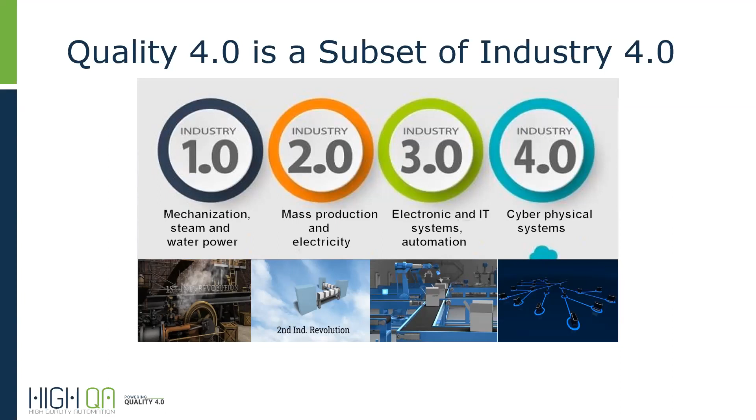But actually, if we look into the CAD/CAM industry, it started to evolve in the mid-70s, about 45 years ago, enabling seamless and automated design to manufacturing. And since then, CAD/CAM became more advanced, intuitive, faster, moving from wireframe technology to solid model technology, and enabling realistic design and manufacturing, including analysis like flow and stress analysis and much more.

But let's take a look into the quality side, and we'll ask the question: how long does it take to create a print, bubble it, extract GD&T to an inspection plan, create in-process inspection, assign inspection tools, collect data, and so on and so forth? 370 minutes—those are the average times that we measured.

And the question is, why does it take so long? And what will happen if we have to add more quality activities? We need SPC, we need APQP, we need to create sampling, lot management, and so on and so forth.

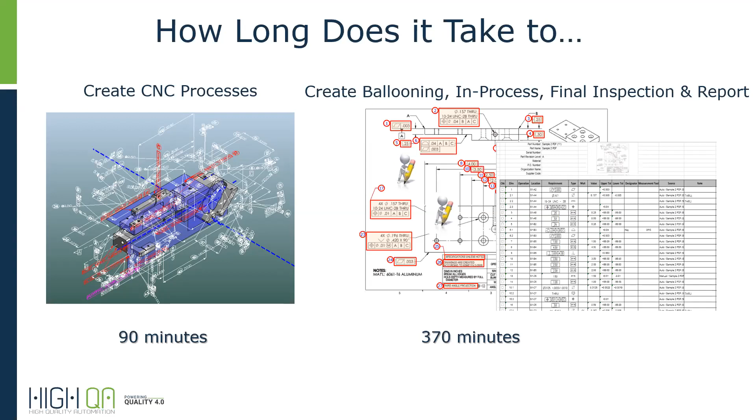One of the biggest reasons is what you see on the screen. I'm not sure how close to CAD/CAM the industry is today, but more than 80% of the industry is still making bubble prints by using pen on paper, and then extracting GD&T to an Excel sheet manually. There are some big gaps when we talk about Quality 4.0, when 80% of the industry is still doing it manually.

Let's take another example. How many software packages do we need to complete quality jobs from A to Z? We can count them one by one—these are just examples, there are many of them. And then where does all the data that we are generating from each one of these applications or solutions go? Can we get it real time? It's a big question.

Here's another example. There are hundreds of inspection tool types, tens of thousands of measurement tools, from manual to Bluetooth wireless, CMM, vision, arms, laser—you name it, you have it.

Those inspection tools are growing daily. The question is not just about measuring the part, but where this data goes - either on a written piece of paper, typed into Excel, or clicked into Bluetooth tools - where all this data goes and when it is available to me when I need it.

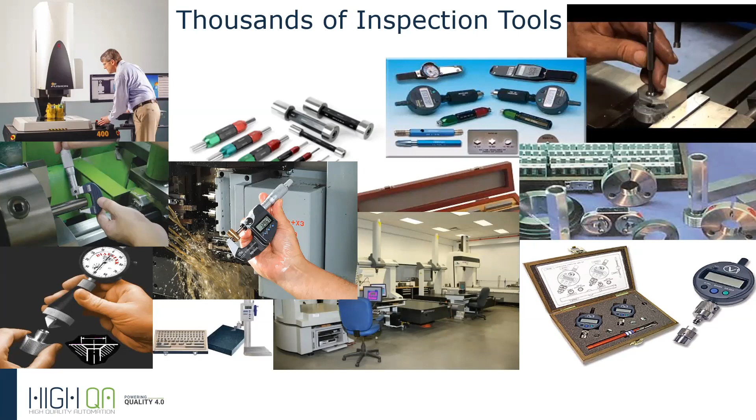Maybe we'll take another example, talking about statistical process control, SPC, which is an industry standard methodology for measurement and controlling quality for the manufacturing process. Actually, SPC is a growing demand by OEMs from their suppliers, and it's adding a significant burden and cost that requires expertise and another software solution in many cases, among many others that are already part of the quality process.

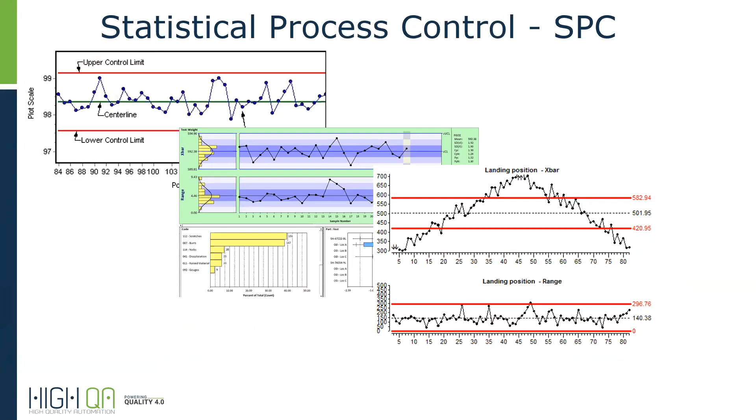Well, we can go on and on. Maybe one last example - the APQP. The APQP consists of multiple packages, activities, forms, and workflows - FMEA, PFMEA, control plan. What software do people use? Talking about 99% of the industry, we all know it's Excel. But not just Excel - it's Excel on steroids. You can find people proud of how many tabs they have on their APQP Excel file.

No doubt those people are amazingly skilled and talented, but again, it's done manually. And the question again is about data. We have a lot of data - we have data here, and we have data in data collection. The question is, where does all this data go when I need it?

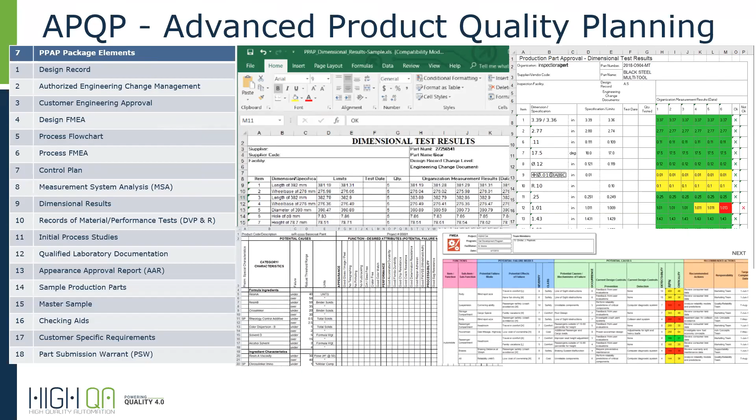So one of our strategic customers - I'm just trying to quote what he told us - said: I have a lot of data, but I don't have information. My data is spread all over the place, in endless software folders, as well as shared or hard copies in boxes, reports, plans. And we have in-process inspection and SPC.

And the question is, what am I going to do with it? I can do nothing with it, actually, because it's spread all over the place. My hope is that no customer will come and complain, so I won't have to spend two weeks trying to find the data. And this is what he told us: I have a lot of data, but zero information when I need it.

And that's when we talk about quality 4.0. As quality guys, we have a lot of data. The question is, do we have information when we need it? Because quality is an integral part of manufacturing. It seems that we are only chasing manufacturing by adding more and more inspection tools to be better - better at go, no-go, or good part, bad part. And this is what quality is considered today.

But we are at a stage, or at a point, where we need to change it. We need to change the notion of the go, no-go department and try to close the gap of 45 years of being almost completely manual.

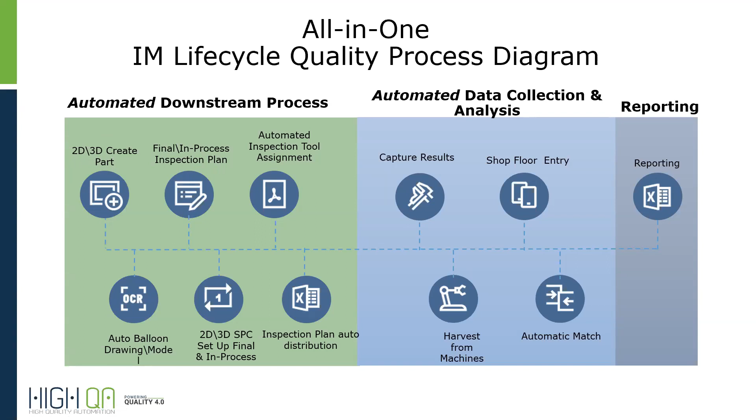You'll count how many systems or how many types of Excel you're using to complete one job - you know better than me. It can be 5, 3, 10, or much more. And the idea is, it's all in one. The reason we're talking about quality 4.0 is because it's an all database-driven application. So there's no need anymore to save as in folder X, Y, or Z and try to find it. Then there's a layer of API, because as a quality management system we live with other systems like ERP, PLM, and others, and we can integrate with them.

There is a layer of security on the user level and on the company level. Then comes the data source, 2D or 3D model. Then comes the layer of APQP, as I mentioned earlier. This is no longer Excel, it's an application integrated with the entire process. Then comes the layer of functionality that enables us to do A to Z. And once it's assigned to the shop floor or supplier, comes the data collection and reporting. And it's all in one system.

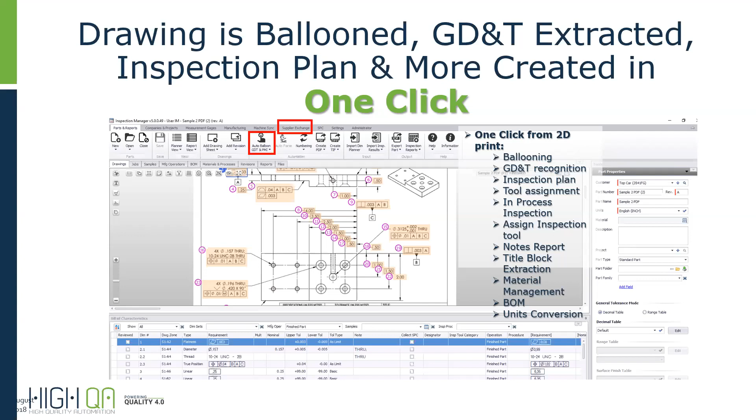Quickly talk about automation. As you remember, somebody used to do this process manually. Now there's one click, GD&T extraction, and all the balloons are created automatically, generating the bill of characteristics. It means we are taking away interpretation from people.

We support 3D, as I mentioned earlier, and we support it in a way that also closes the gap. When you get a 3D model, it's mainly limited dimensions or just critical dimensions, but the model describes the part, and quality is the process. We close the gap between what we call MBD and real quality processes.

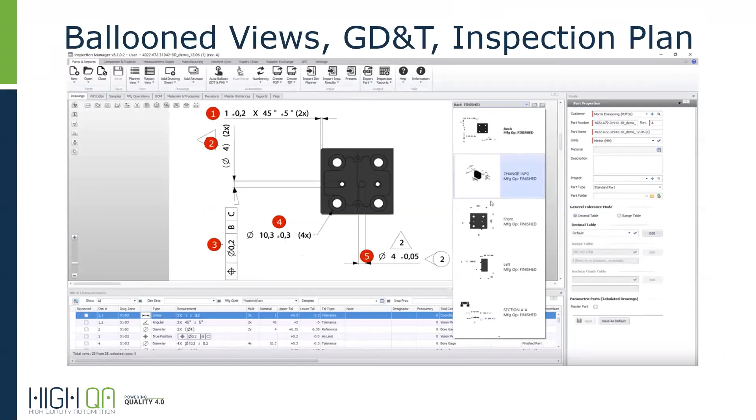Then comes what we call the checklist. If this is a project, you can see all your projects in one view. Once you've completed the forms, the system creates the submission package and can send it to your customer with the part.

Talking about shop floor data collection, as I mentioned, it's all in one. Data is collected from all types of inspection tools, manual inspection tools, Bluetooth, wireless, you name it. But it's not just collecting data on a piece of paper, it's going directly to the database.

When you see the SPC or out-of-tolerance data, everything is real time. I can correct my process if I need to, because I see exactly what happened in every dimension I'm measuring. Then comes the richness of reporting, from 2D print or 3D model all the way through reporting, and everything in between, in one solution.

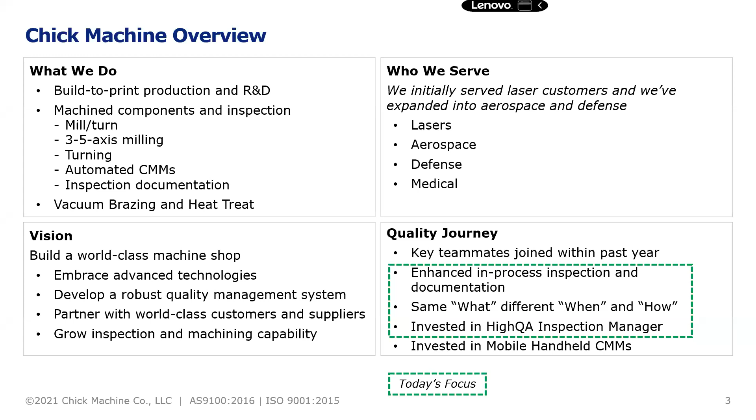Cool, yeah, thanks. And then kind of getting to the inspiration, this is Bobby, by the way, for HighQA.

Specifically the aerospace requirements around new product introduction and beyond, we started to see a bottleneck emerge probably about a year ago. So naturally, we started seeing parts pile up in quality. The team was starting to be overworked, and we stopped and said, what's going on? What's driving all of this?

We can machine the parts. We have the capability. We can inspect the parts. We have that capability. But when we started to dig down deep, we started to see that we didn't necessarily have the documentation capability. We kind of did it wrong, and we didn't do it at the right time.

Some examples were, again, the machinists inspected parts on the floor to ensure they were good, but they were just looking for that feedback for themselves that it was a good part.

But that's not good enough for an AS9102. Trust me, 'it's good' is not going to work, and checking part of it and writing down part of the inspection plan is not good enough.

So what ended up happening was all of that work unfortunately got shifted or collected by final quality. Not only were they creating these handwritten inspection reports in AS9102s, which is what you could see on the left hand there, but they were rechecking the parts because they had to verify that they were good parts, and they were, but it was handwritten.

And then aside from the handwritten inspection, with the CMM reports, we would print - I think there was one day we did a 337 part job, 100% inspection, all checked on the CMM, but our output was 700 pages of PDF, which is, you can't search that, you can't aggregate that, you can't summarize that, and quite frankly, it doesn't meet the needs, and it's not customer friendly, right?

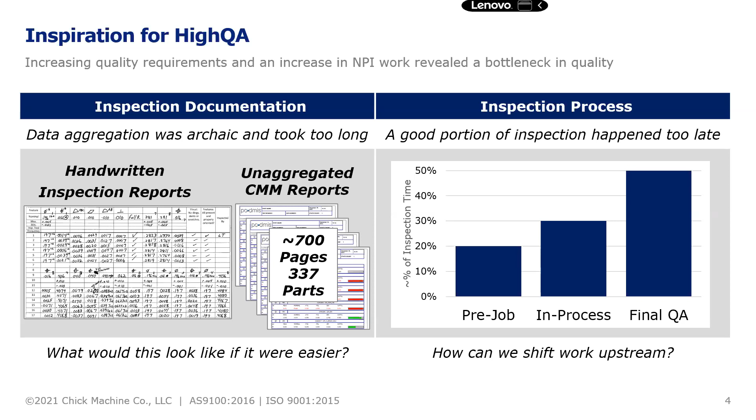So that's really what kicked us off on the search, and my dad could touch on what got us started. Yeah, so what we did after that, recognizing that the process was inadequate for the volume of measurements and the way in which we needed to present them to the customer, started a search on Google for what else is out there, looked in Modern Machine Shop, just did some searching around, and located two different software packages, one being HighQA that we put through - watched the demos, did the test drive.

The balloon printing, the auto ballooning, and the bill of characteristics really grabbed our attention quickly with HighQA, and we started on our way.

And that's something we'll talk about too, is that I think it's really important not to wait until it's perfect, but just to get something going and figure it out as you go, because you can learn a lot and learn really quickly by doing.

So we had some false starts. We bought what we thought we needed, and then we had to go back and buy more, and then we had to go back and change what we bought. But that was probably a 6-month process before things stabilized.

But we had initially thought we could gather shop floor measurements with Excel sheets and then import the data back into the HighQA database.

We also thought the PC-DMIS information, the output from the CMMs, could be written to a CSV file or some Excel form and then later imported. So we had a lot of multiple touches of the data. We had to handle it when it was first recorded and then handle it again to import it into the database. Found that was not an efficient way to do it.

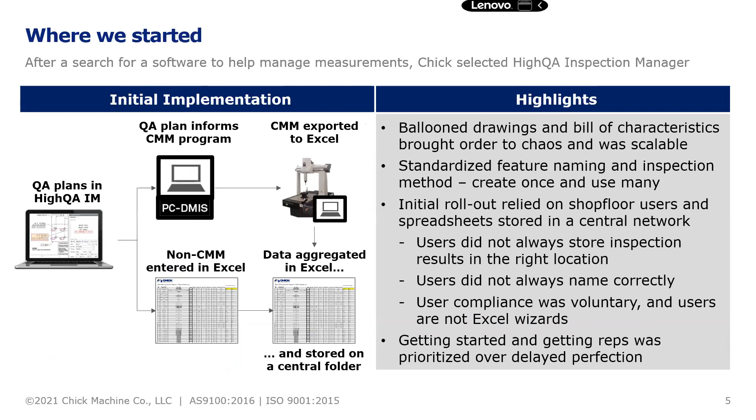Something to add specifically on IM: if you look at from where we were with the Excel inputs to where we are with IM - our machinists are fantastic at making beautiful, dimensionally correct parts, but they're not Excel wizards. So there was a lot of struggle with even data input, and a ton of time on the floor troubleshooting these Excel sheets.

So from a poka-yoke perspective and mistake proofing the process, this has been fairly successful. You have to have leadership support to do this, which my dad will touch on in lessons learned. But without traction and pull from the floor, it's a fruitless mission.

Specifically on IM, we've run out of licenses at times because people are using it, which is a good thing - which is also good for Sam, because we have to buy more.

Another thing on top of that, we've had some of our lead inspectors demand computers being rearranged and put on the floor where they do their bench inspections because they don't want to walk back and forth - which is a good thing, right? We didn't have that pull with the Excel sheets. We are getting that pull with IM, and if we could fuel that fire, we're going to do that. This seems like a relatively light lift to get traction on the floor.

Yeah, and I think the traction on the floor came from Jake's people going out when a job was assigned to help the machinist understand how to use that interface, how to use that application. And once you get using it, the learning curve is pretty shallow.

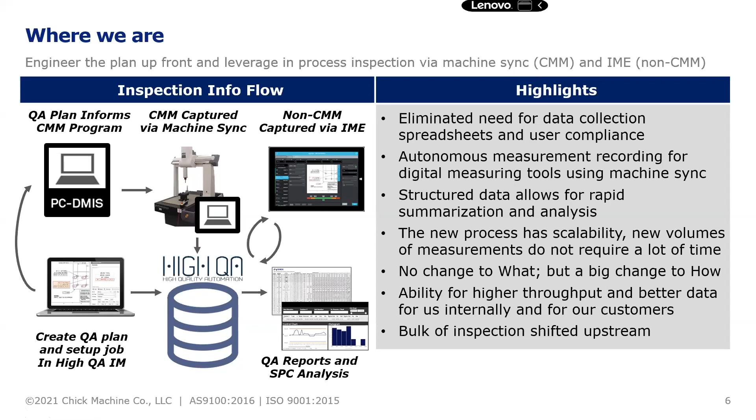So next steps for us regarding implementation: we want to complete machine sync for all possible measurement sources. I mentioned we have automated CMMs here, and we also have some other automated inspection equipment. Anything that essentially isn't a hand tool or a hand measurement device can output a CSV file, and that syncs up with machine sync and aggregates that inspection data back to the HighQA database. So that's one of our goals.

With that, we want to increase our use of the measurement data to drive SPC and APQP. So we are half job shop, half production shop.

Aggregating that data obviously applies to production runs where there's much more volume, but standardizing that and leveraging the statistical side of this is what our capability is, and it's obviously where the industry is pushing us and where we want to go, especially with HighQA. Sam and his team understand that you can intelligently reduce inspection with proof through statistical process control, and I've not seen an application thus far that enables you to do that within the module itself.

We want to fully utilize manufacturing operations within HighQA to build out sampling plans. Manufacturing operations are essentially the mini inspection plans within a process. A lot of times in this industry, we're making parts that are bare and then send them out to be processed, whether that's being plated, anodized, what have you. HighQA enables you through manufacturing operations to essentially be the manufacturing engineer as well as the quality engineer, and create a subset of manufacturing tolerances that you want to hold your parts and dimensions to, so that when the part goes out for plating and there is dimensional buildup, it comes back in tolerance. In a previous life, that was always done in a different department, on a different platform, different software. It was effective, but it was not efficient. HighQA, through manufacturing operations, enables us to do that all within one plan at the same time.

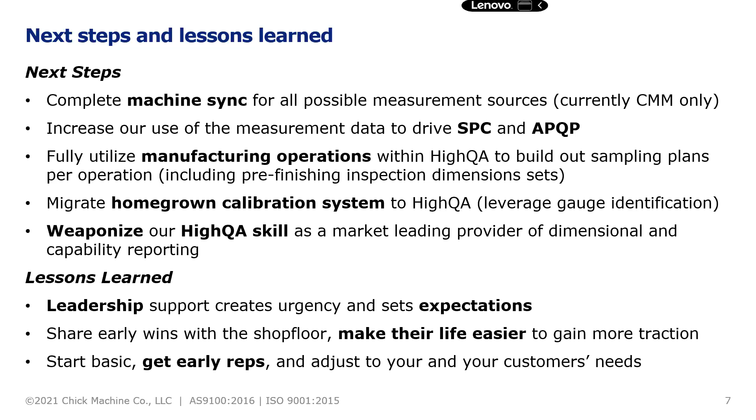And then we talk about wanting to be a world-class machine shop, but then you look around — how many world-class machine shops are handwriting inspection, scanning, and printing 700 pages of a job pack? At some point we were like, this is not industry leading, it's not who we want to be. Something different.

All right, so with that, that's kind of our story, our journey. We're still very much in the early stages. We're happy with the gains we've made, but we know there's still a ways to go.

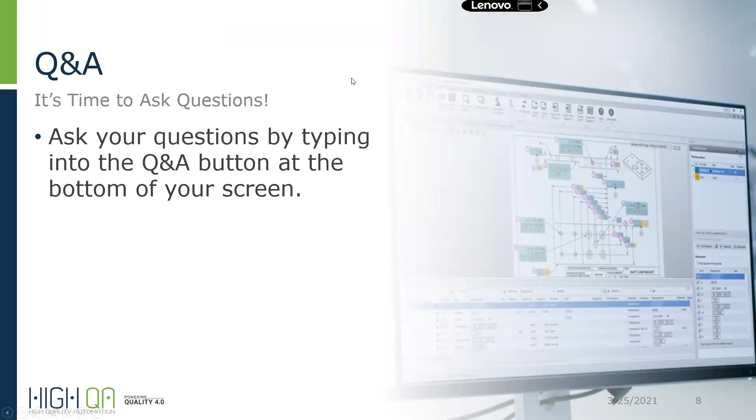I will answer it. Can you hear me? Yes, thank you, Sam. Let me, I want to share my screen if you don't mind. Can you stop sharing your screen, Bob, on your side? I'll do it just quickly. I think I can share my screen. You cannot. Okay.

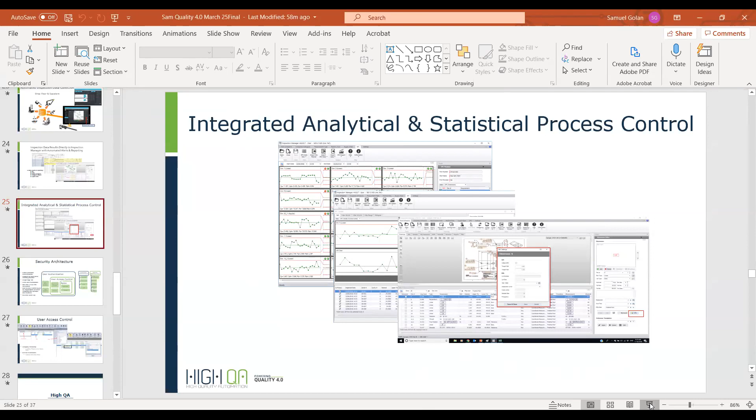Yes. All right, so my last slide was here because I wanted to give more time to Chick Machine to speak, but the next slide was actually supposed to be this one about this question. In my presentation, the second or third slide was the security layer, and aside from managing users and credentials, what they can and cannot do, there is what we call access control. The system segregates between location, department, teams, and users. Talking about large OEMs, which I will not mention names here, you can segregate the data so that certain people in certain departments and certain locations could access only, and nobody else can see it at all. So we can segregate and separate data sets in the database for a specific team to use, not only in one location, it can be multiple locations or multiple departments. So we have this as well.

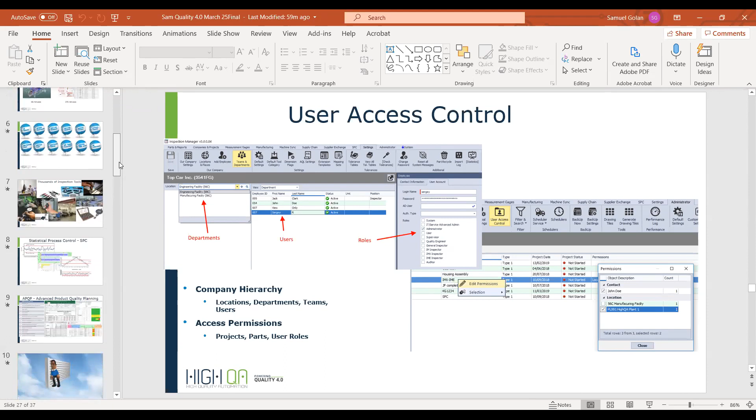I think there was another question I saw, about integration with ERP. Am I right, Lisa, that it's on the list? Yes, that is on the list. Okay, I will answer it as well, if you don't mind.

With that being said, I want to mention that we are already integrated with a couple of large ERPs like SAP or Oracle, and some smaller ERP systems, and PLM as well, like Teamcenter and Windchill. One of them is PTC and one of them is Siemens.

Here's another one for you, Sam. Does it work well with PDF type prints? Can you repeat, please? Does it work well with PDF type prints? It works very well with PDF print, it works very well with TIFF print, and it can even work with JPEG. So we work with all kinds of 2D files that represent any type of drawing, but it's mainly GD&T. Yes, the answer is yes, it is.

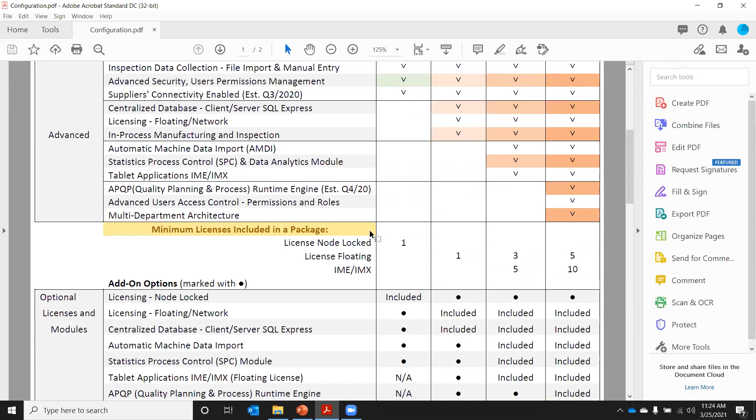Here's inspection manager positioning, packaging. Yes, exactly. So to answer this question, there are what I call 3 families. This is relevant for a small job shop that has all the functionality you need from start to finish. There is a factory package, which gives you the same ability as job shop, but it's sitting on a centralized database, stored on a server, and then there is a floating license. This enables more functionality, like automatic machine data import. I think the team at Chick Machine mentioned that we collect data automatically from any inspection tool. So there are packages that enable a certain amount of licenses, so you don't need to buy everything, and you can grow as you need. You can even scale up from one package to another, where the previous package will credit you when you scale up to the second package. There are also multiple modules you can add on, like SPC, APQP, model-based definition, and so on and so forth.

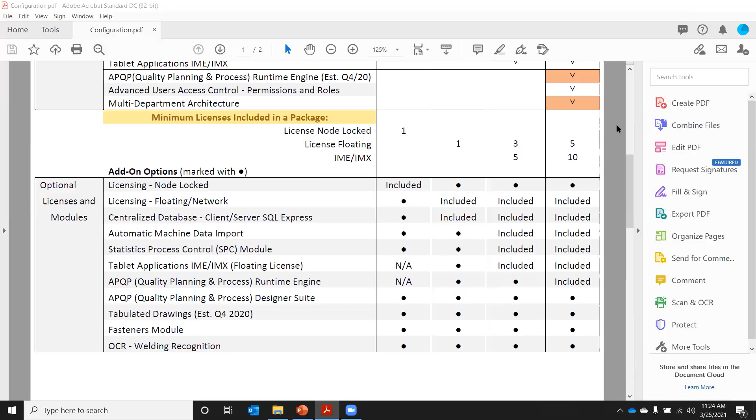To stand up this solution, can the backend be installed on a Windows 10 PC or is installing on a server preferred? It can be installed on any Windows machine, and our database can be installed on a dedicated machine. It doesn't need to be a server. Although if our customers have their own SQL server, Inspection Manager can be installed on their SQL server. Just plug it in on your SQL. So it can work on both.

Perfect. Here is another question. It says, what or how is the situation of non-conformity out of SPC handled through corrective actions, with specific assignment to process engineering, maintenance, or the collaboration team, etc., and define preventative action to avoid the problem occurring again?

Amazing question, great question. We will have to do it one-on-one probably and show you the process, how actually whatever triggered the non-conformance, out of tolerance or whatever it is, is handled as an integrated non-conformance in the system with the corrective action. We handle it, but we need time to show how it really works. But yes, we have it. Sure, we will take that offline then after the session.

If you remember here, I'm going to use it again with your permission. Any inspection tool—you can see my screen, Lisa? Yes, I can see. Okay. Any inspection tool, and by the way I don't know if this is OGP, but this is an optical machine—any inspection tool that generates digital results, we get data. It can be OGP, or it can be any inspection tool: CMM, VMM, Equator, and of course all those inspection tools that are connected wirelessly, wired, or via Bluetooth.

And then, of course, when we talk about manual inspection tools, I think Bob and the team at Chick Machine mentioned gauges, micrometers that are not generating digital results, are entered manually on a keypad directly into the IMX or IME that works on a tablet or PC. To the question, yes, we support OGP and any inspection tool on the globe.

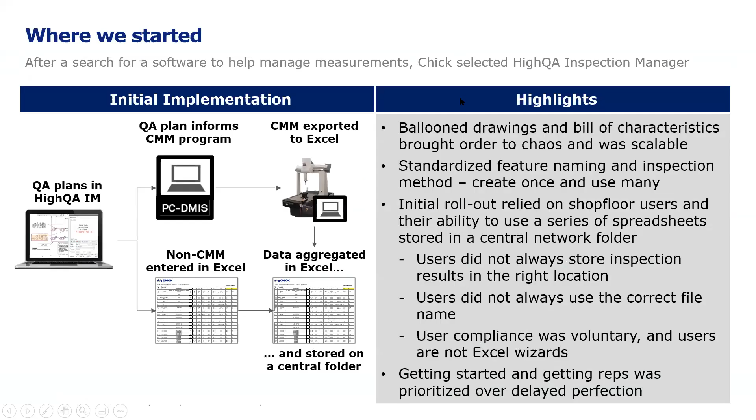Thank you. Thank you. Bye.